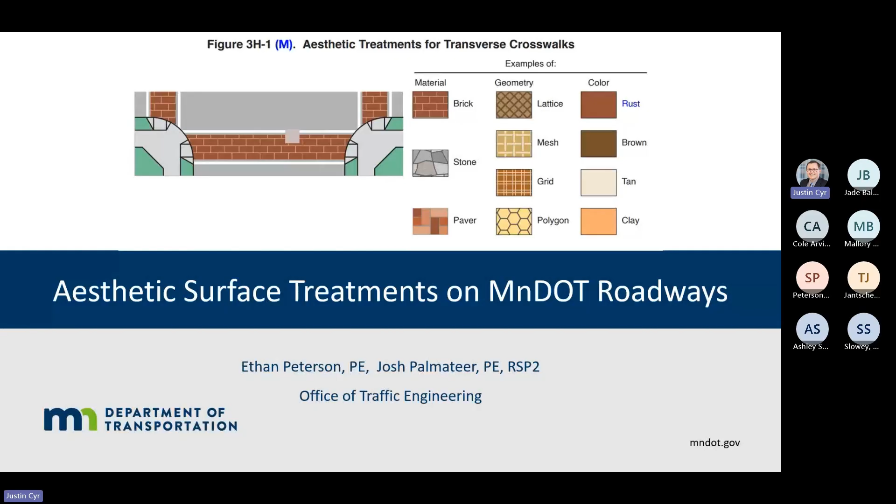And I definitely want to thank Josh because he's been on this project and he's really driven this through and has helped us put together a lot of this framework. We want to explain what ASTs mean in this context, why guidance is really needed now, the main guardrails in the technical memorandum, and the application progress. So the overall goal is a clear and consistent approach that can support community ideals while protecting safety, uniformity, and long-term operations.

Sorry, I've got to dual wield these computers as we go through this.

So this is just the purpose and outline, and kind of what I said in the last slide. We'll go through what an AST is for MnDOT and what it means on our right of way, why guidance is needed now, where ASTs may and may not fit in, materials, skid resistance, colors, and restrictions. There's a lot of restrictions that the feds have put on us with the new MUTCD. We can kind of go over a little bit of that. And then the application process and really the next steps with all of this moving into the future.

And I expect it to change every time, I'm sorry.

So at a basic level, an aesthetic surface treatment is a decorative pavement treatment used for placement and placemaking and community identity. These treatments are most common in pedestrian-focused spaces such as plazas, curb extensions, medians, sidewalks, and similar areas. Probably seen them a lot in sidewalks, honestly. For MnDOT, the key point is that AST has to remain clearly decorative. It can't interfere with visibility, accessibility, or official traffic control devices. And that distinction is really what drives the rest of the guidance I'm going to go over here. Well, me and Josh.

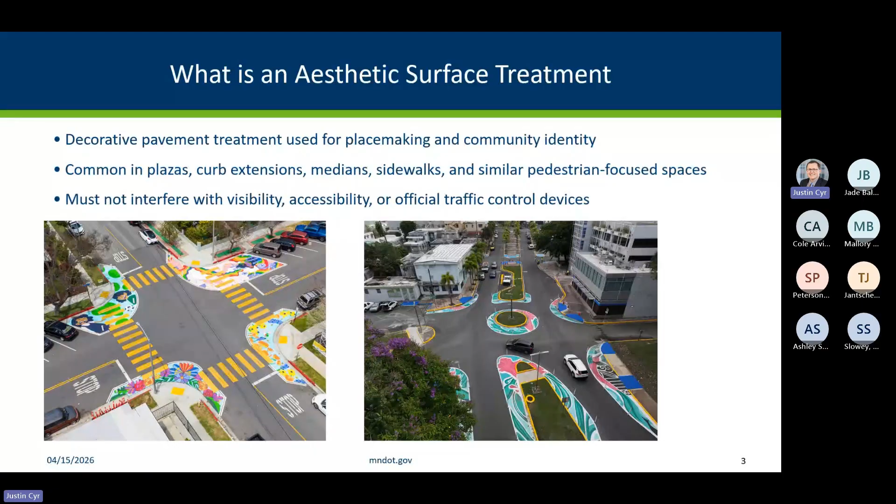So we kind of divided it into, and I did the reverse that time. We've kind of divided it into permanent ASTs, temporary ASTs, and infrastructure aesthetic surface treatments. So it helps to think about these treatments in these 3 broad categories. First, the permanent uses durable pavement marking materials intended to stay in place for about a year or more. So we'll get to materials later. I'm not going to jump ahead. Second is the temporary ASTs, which cover shorter duration treatments, which can be fully removed or they're out there just for a few weeks, maybe a couple months at a time.

Third is infrastructure aesthetic surface treatments, which is something that's built in to the facility itself from the start. So think like dyed pavements, colored or pattern paving. That distinction matters a lot because not every treatment type is going to be handled the same way and won't be handled in this aesthetic surface treatment tech memo. So yeah, as I kind of alluded to, the temporary isn't going to get covered in this, and the infrastructure isn't either. Mainly because temporary is out there for so short of a time, it's not really going to be that big of an issue. And then infrastructure aesthetic surface treatments are something that you're going to have to be thinking about at the beginning of projects, and you're going to have to incorporate it into everything.

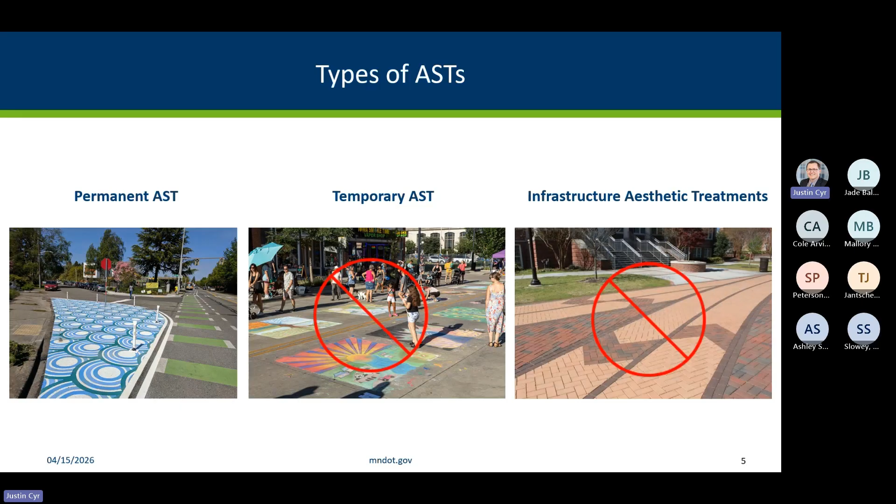So another early screening question is whether the installation is being credited to a specific artist. This is going to be a big deal for us because if the answer is yes, there's a policy that's been put together and has been going through all these iterations, and it's the Art on MnDOT Right-of-Way policy, and that's going to really drive how artist-attributed art on our right-of-way will be dealt with.

It's a little bit more onerous. That matters because credited artwork raises additional considerations, including intellectual property and the fact that the installation may not be intended to function or last like a standard permanent treatment, like a lot of the other infrastructure things that could be out there. The main takeaway is to identify this issue early and then know that you're going down that path and not this one.

So why now, right? There's just a growing interest nationwide. We're definitely getting the questions more and more, especially with the MUTCD being updated and having something specifically for that. I'll talk a little bit about the development of the MUTCD here soon. Definitely more requests coming out. And then FHWA research is still evolving. I don't know how much you've seen on the aesthetic surface treatment crosswalks nationally. There's some contention there. And MnDOT needs a consistent statewide approach to apply these and make sure that it's fairly applied, right?

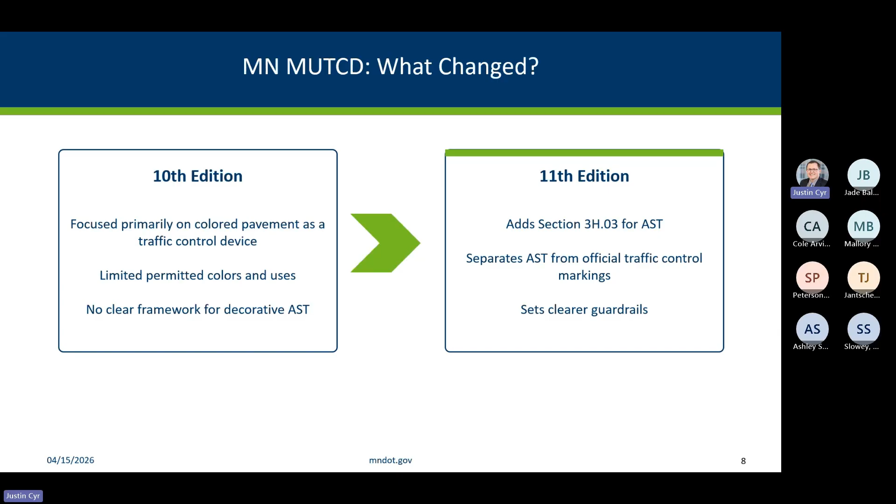And then with the new 11th edition, it really dives in, and it doesn't give us everything we wanted. It's the MUTCD, so it leaves a lot open still, but it definitely adds that section specifically for aesthetic surface treatments, and it separates AST from the official traffic control markings. It's more of a set aside, making sure that it doesn't line up with traffic control devices that the MUTCD controls, not telling what that should be. And it definitely sets clear guidelines because there weren't any before.

Good evening, everyone. It's been 13 years that I've been sitting here watching presenters, and now I'm finally here presenting myself. So awesome. Well, thank you guys for joining.

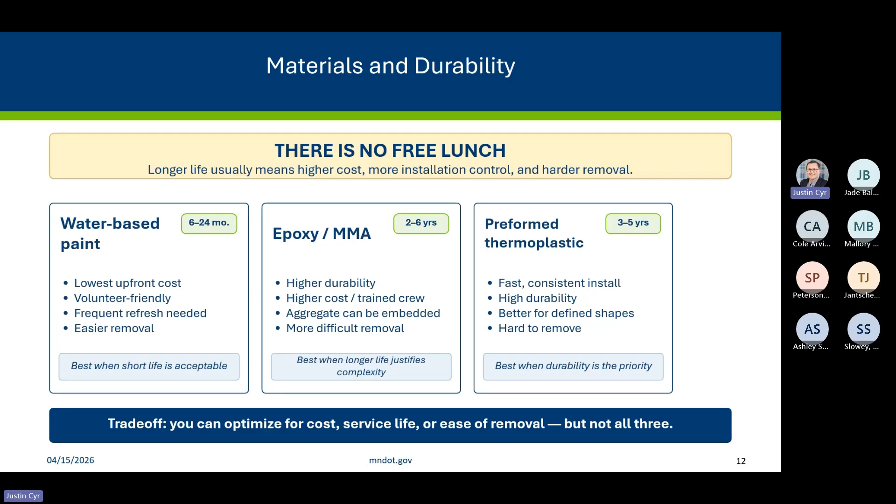The top one uses latex markings, and the total cost for the project was $1,000. It can go pretty cheap. That was in Seattle. And then in Des Moines, there was a preformed thermoplastic project, and that was upwards of $240,000. So there's a wide range of costs depending upon what you're looking to do.

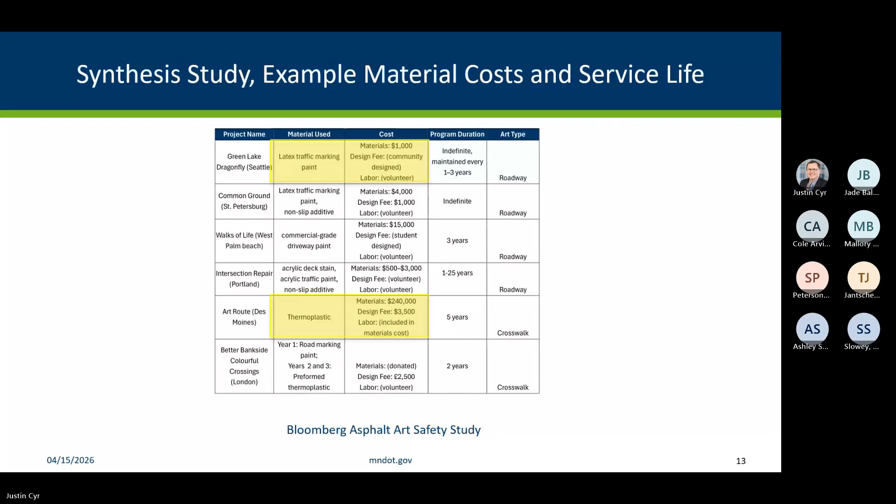One of the critical factors here is pedestrian safety. No matter where we're putting aesthetic surface treatments, whether it's on the sidewalk or on the shoulder, it's important that we have a level of traction there. If you just go out and put epoxy or paint down, there's going to be very little traction for pedestrians or bikes or vehicles, whoever's on those facilities.

So MnDOT's going to be requiring that we add some skid resistant material to all markings. We also are going to be requiring that we don't cover detectable surfaces or truncated domes. And for our vision impaired users, we ask that we don't have long straight lines or borders or stripes, just because it could look like the curb to a roadway.

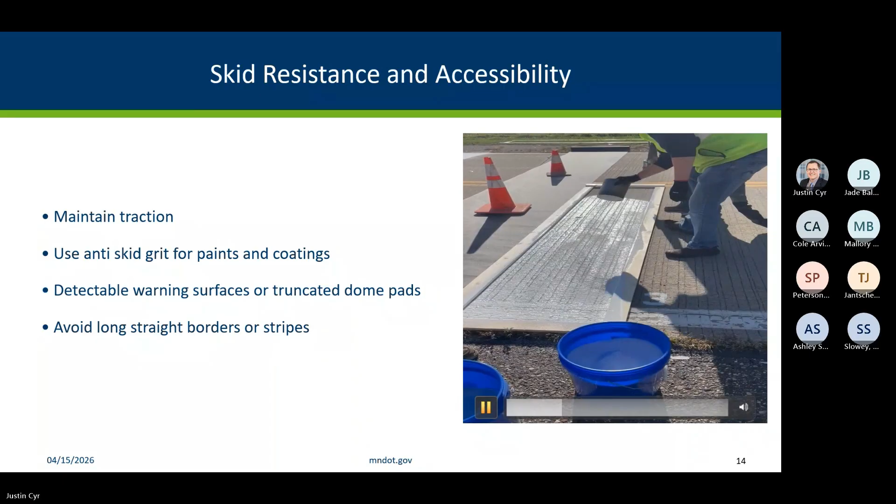Let's see, and I think there's a video. Could you hit the button for the video? The video just shows skid resistant material being applied to a stripe. So you can see one person is painting, and then the skid resistant material is being applied as they go along. Yeah. It's a short video. Epoxy with... a little different than what you put in latex. Yep.

This is what they call corundum, which is, yeah, I'm trying to remember the actual name of it. I think it's a silica, and so it's something that's pretty hard. What we require in skid aggregate is a Mohs hardness of over 7, and this is 9. So it's pretty hard and durable. So they put it in a lot of the really durable markings because it can hold out as long as the material. It is. Yeah. It's like a white translucent.

There's also some glass, crushed glass that you could put in at times that would also work in latex. Something like sand would work perfectly fine, to be honest. Just give it a little grit, especially knowing that it's not going to last all that long.

Yeah, something to consider is if you're, like in the video, adding skid resistant material on top of the pavement markings, it could change the color if you're using sand. So if the community is looking for very specific colors, something to consider is which material you use.

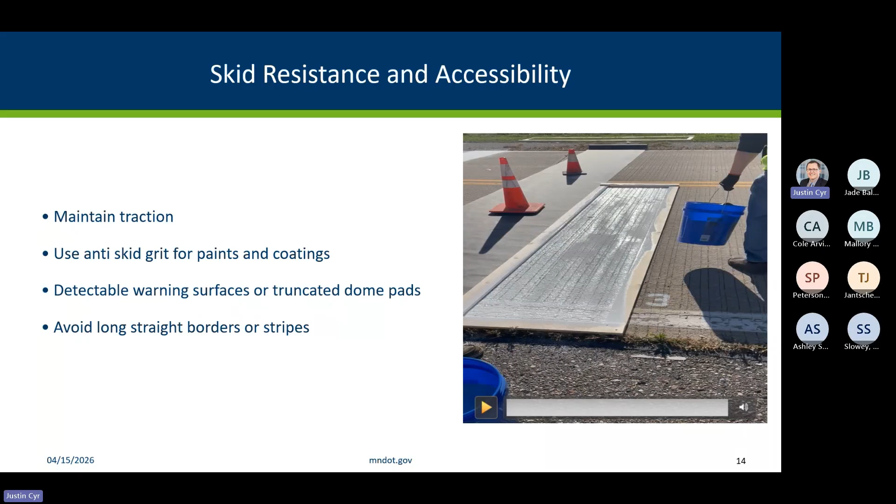Oh, there we go. Okay.

So not every community is going to be able to just apply anti-skid material as they're going along. So we have a couple of options here for adding skid resistance to our pavement markings. The first one is they do make a mix-in additive. So you can purchase paint and then mix in those additives before the material is applied. The second option is kind of what we just saw, broadcasting on your paint.

So some compromises there, especially with color and the uniformity of application, but that's going to give you a higher skid resistance. The third option here is broadcasting with a lock coat. So my understanding is basically the community's done with the ASTs, you're going to add a layer over the initial AST, a clear coat, and then you'll apply the skid resistance on top of the clear coat.

And the next one is work with your manufacturers. They might have a product that comes pre-assembled with the skid resistant material. That's going to give the best uniformity and, I think, the best traction. But there's compromises with cost, and it could be a proprietary, less flexible solution. They might have restrictive colors. Check with your manufacturers.

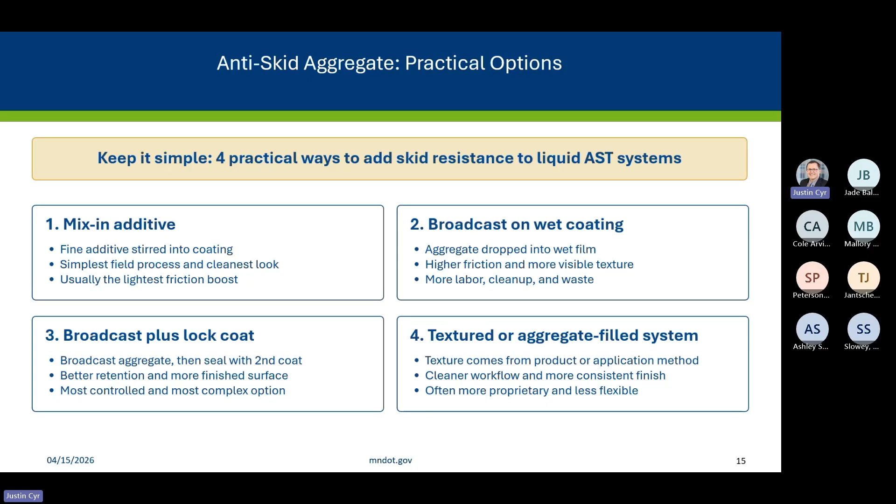Move. Go. All right.

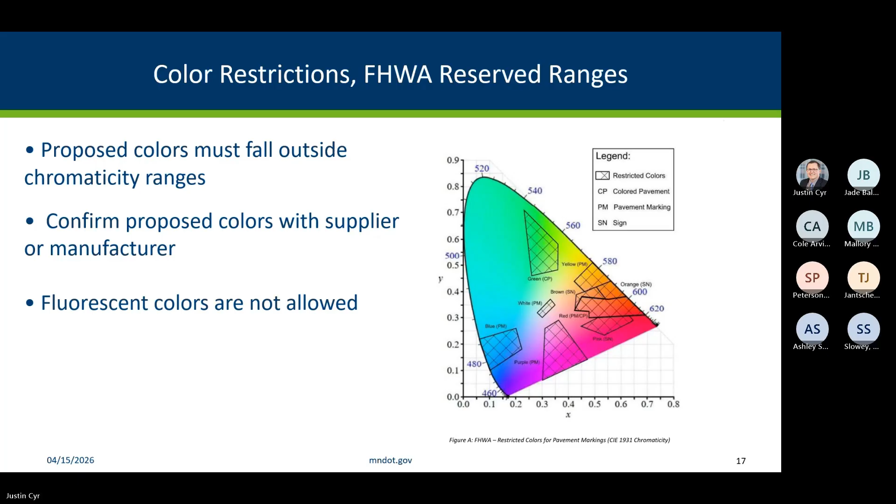One thing that we're going to require is that we don't extend aesthetic surface treatments onto any vertical surfaces. The reason for this is vertical surfaces are themselves a hazard, and we don't want to disguise the hazards. People are expecting a gray curb, not a blue one.

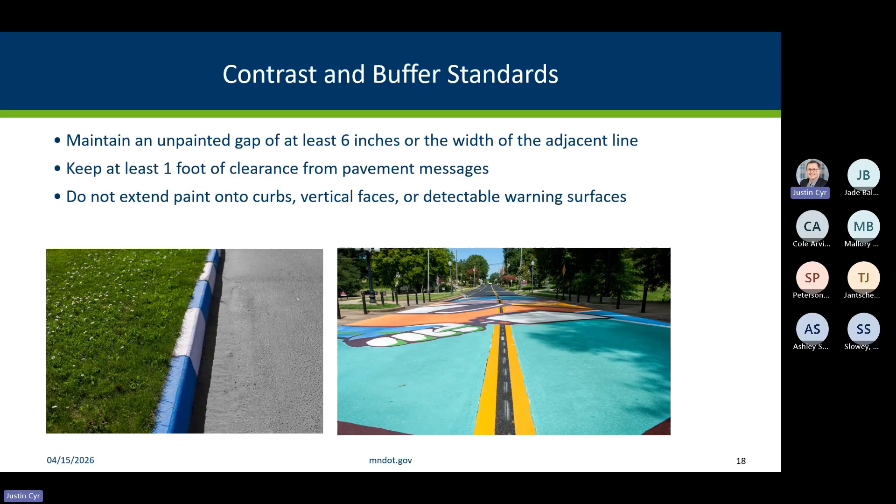Yeah, that's what we're doing. I think an example. It's more shoulders. Like if you're gonna do it on a shoulder and then you're offsetting it off of your edge line, making sure that that edge line is clearly defined. Sure. Or like in the parking lanes, right? If the parking lane stripe is 6 inches, then we would require a 6-inch clearance between the parking lane marking and the aesthetic surface treatment.

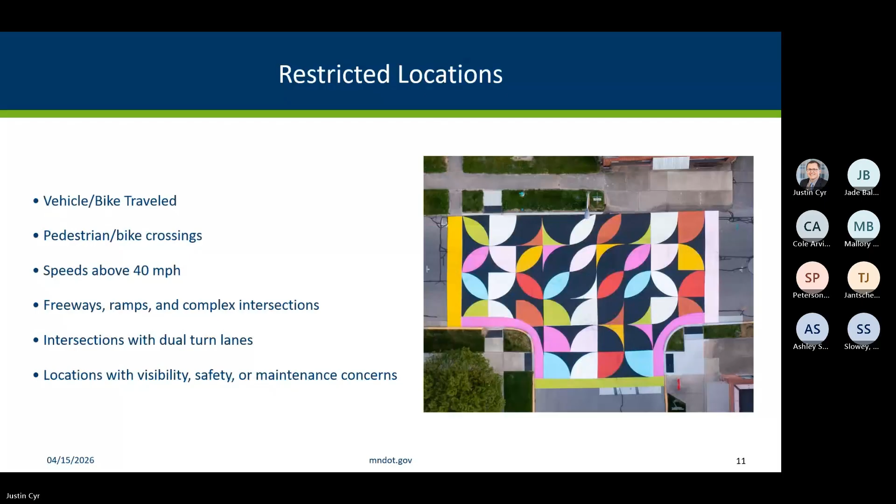Less likely that it'd be up against. Yeah. Not likely. It's more than likely gonna be up against an edge line or center line. I'll repeat questions. Okay.

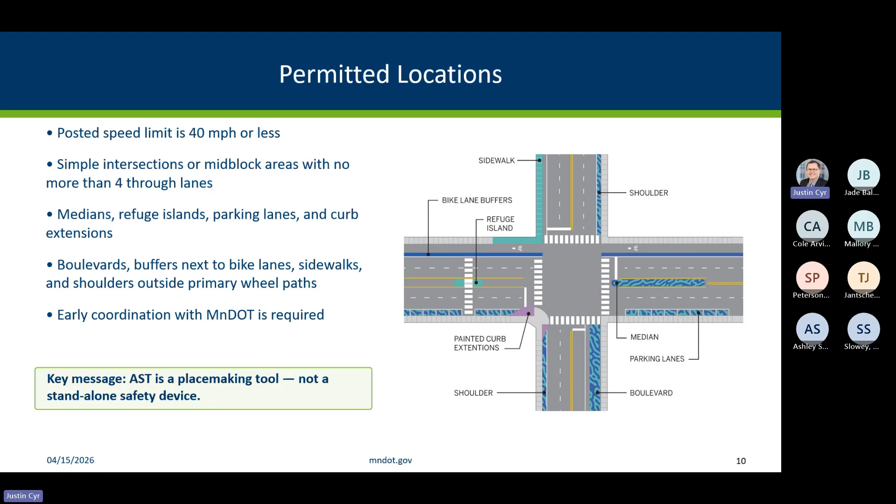Then Ethan, I think it goes back to you. Okay. Look at you. Cool. Bring her home here. But I guess, yeah, we haven't went through questions. I'll keep that in mind.

And the last one, I guess, was based on where we would see our ASTs going against a longitudinal marking. And that's what we were pointing out, that would likely be in shoulders or buffer areas, because we're not allowing it in drive lanes like that picture showed.

So, okay, content restrictions. This is another area where MnDOT draws a firm line, and I'd say that a lot of these restrictions are straight out of the MUTCD. Like the first one right there, no advertising, logos, trademarks, or sponsor marks. That's in the MUTCD. No text, lettering, numbers, or initials on pavement. No traffic related symbols. So just stay away from anything that could be a traffic control device, right? We don't want to confuse people out there.

No games or designs that encourage lingering, right? Like hopscotch or something on the roadway. We don't want people pausing traffic to interact with these things. We don't want to make it a hazard, right?

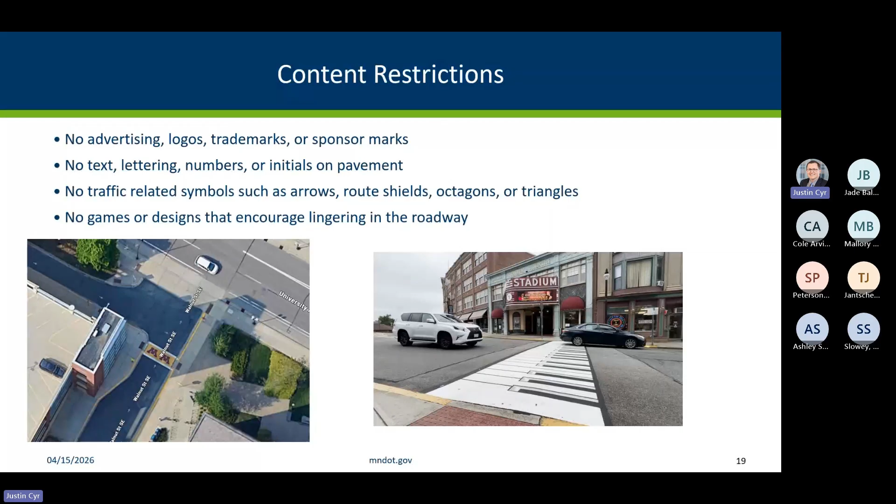And then maintenance and operations: we definitely want to make sure that whatever we put out there, we're able to fit all of our other infrastructure into and make sure that they aren't affected negatively as well. So avoid painting over utilities and drainage features. And even around them, I know that we might put some around them, but it'll be interesting to see how it affects watershed. It shouldn't really be a big deal if the grading's correct, but some of these pavement markings can build up a decent amount, and maybe water will get thrown off by the skid aggregate we're throwing in. We'll see.

Sponsor is responsible. So the sponsor will be responsible for refreshing, repairing, or removal if the AST fades or becomes unsafe. So something that becomes completely unrecognizable and starts to look almost ugly, you don't want out there. MnDOT may remove an AST that interferes with maintenance or operations. We want to let them know that if we need to chip seal something, obviously we'll tell them before that. But emergency repair or something, we're going to have to remove that because that's going to trump it, right? And then removal costs may be billed to the sponsor if we're forced to do it. Just making sure that that's on them.

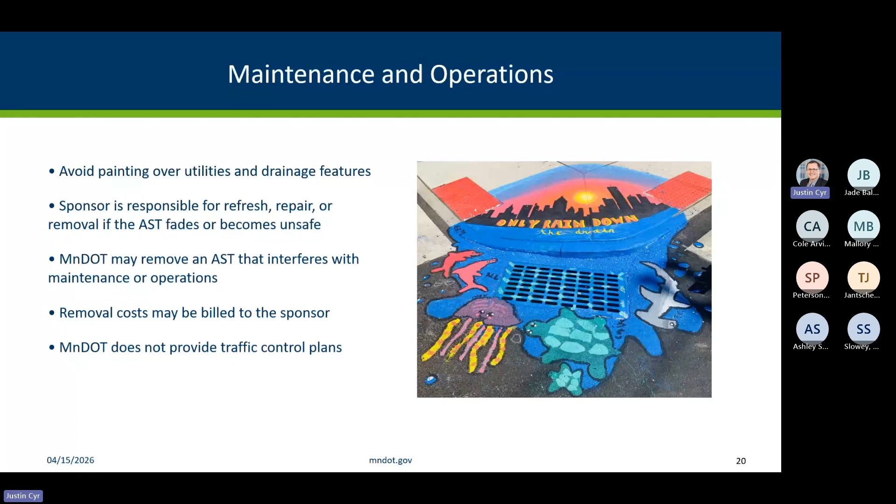So here's kind of the rundown of what we see the application process being. The main takeaway is that the process starts early, not at installation. First, there needs to be a sponsor to be eligible. That needs to be an eligible public entity, so like a city, a school district or something. And they need to coordinate with the district traffic engineer to confirm that the site is appropriate. Then the sponsor prepares the application package and submits the miscellaneous work permit with the required supporting documents. MnDOT reviews that package before anything is installed. And if the request is approved, the project can move into installation and then ongoing maintenance, likely signing a maintenance agreement as well.

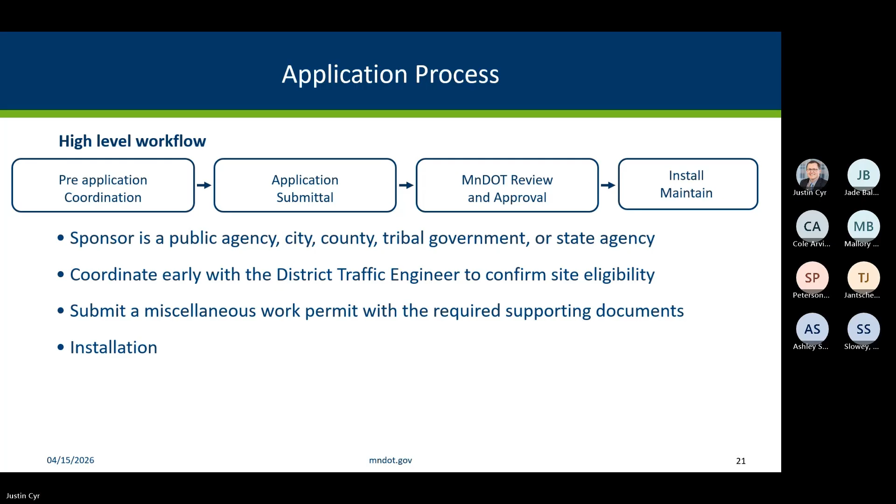So the application is not just about what the treatment looks like, it's also about whether it can be installed, maintained, and supported over time, making sure that there's actual buy-in and they're doing it appropriately and making sure to care for it too.

So I think that's the end. We made it. It's a lot of stuff. I don't know of many states that have jumped on this. Hoping it ends up all right. With any iteration like this, it's gonna be figured out as we go.

As we kind of alluded to, I wanted to touch on the crosswalks and some of that stuff. We decided to stay away from that for now because there's not strong evidence that people with low vision can navigate these things correctly. And also the skid resistance aspect of it needs to be figured out as well. We launched a project looking at how people with low vision actually interact with certain things like this. So we'll be going through trials and trying to figure out exactly how that goes.